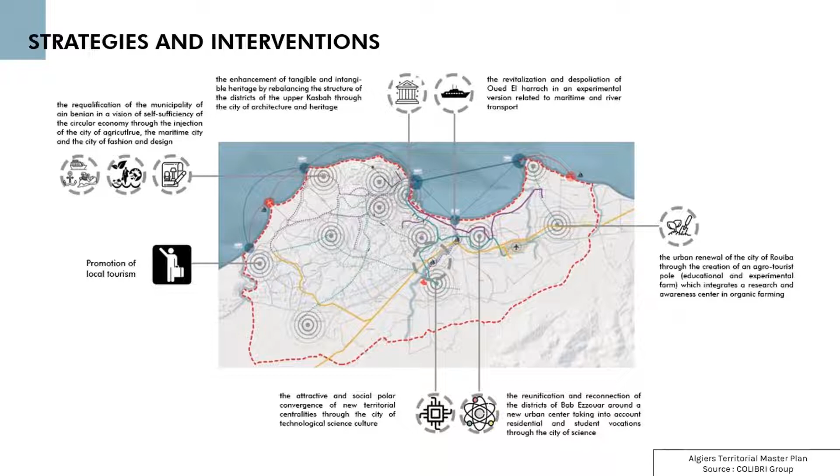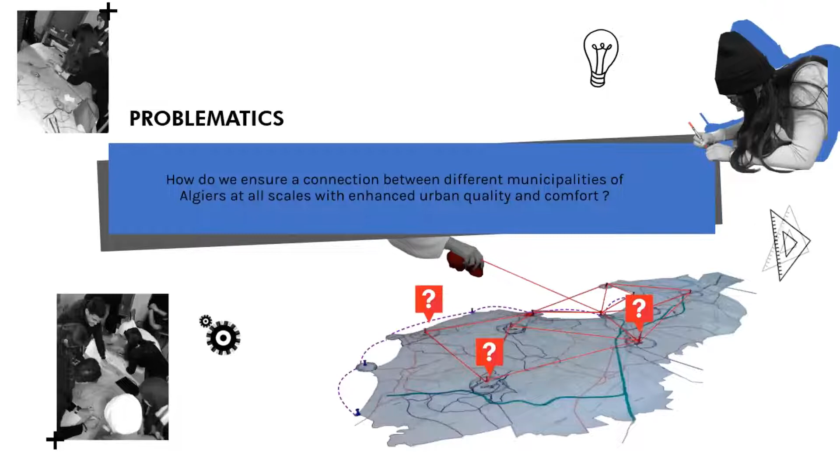Moving on from territory to municipal scale and choice of municipality, faced with a second problematic, which is ensuring connection between different municipalities at all scales with enhanced urban comfort to therefore enhance the entire territory, the logic behind the choice of Baraki, implemented with the aim of my research, which is Algiers' resilience facing the COVID breakouts,

identifies the university hospital centers as a main factor across the territory to first identify the municipalities in need of necessary facilities, to later select a municipality which would act as a catalyst to serve the southern municipalities and connect them to the major regional destinations. The Baraki municipality is thus strategically positioned to grow as a catalytic hub in Algiers.

Located at the crossroads of major existing and planned transportation infrastructure and surrounded by the main southern municipalities in need, it will thus be designated as an integrated node to support the regional growth and connection to regional destinations.

Baraki City is envisioned to be Algiers' second metropolitan center connected to major regional destinations by rapid transit and an efficient road network designed to support walking and cycling. This reflection has been achieved through studies of the urban structure.

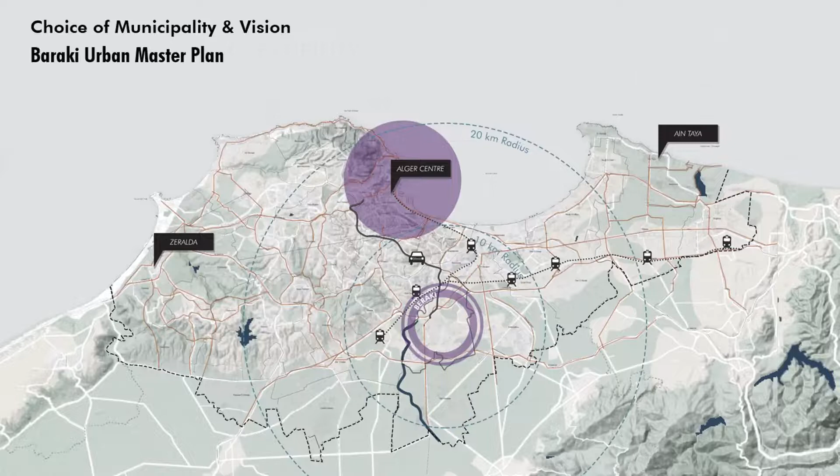Starting off with infrastructure and accessibility, the main national roads are identified to trespass Baraki, depicting the strategic situation of the city, which contains multiple nodes and intersections of these roads, giving wide accessibility through a wide range of access as well as the existing metro and bus lines.

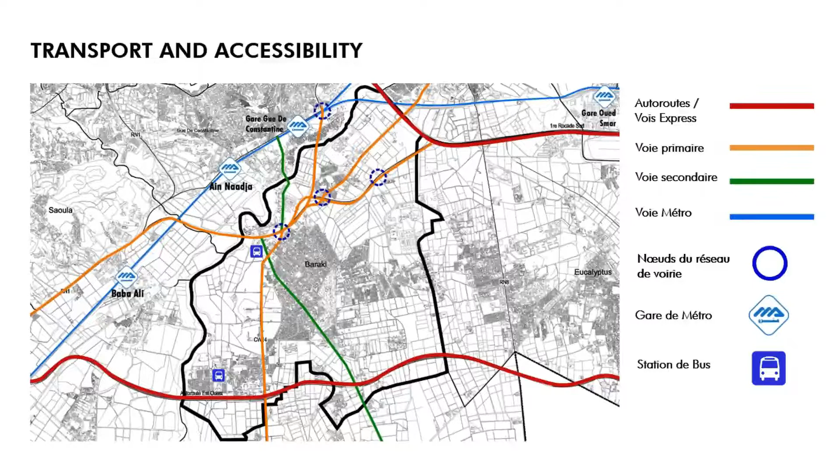Baraki is also characterized by its urban vernacular being intertwined with Oued El Harrach River, which, revered as the Mother River, extends all through the territory and has nurtured the city's history, culture, and economy for millennia, which allowed the city and Oued El Harrach to forge a symbiotic relationship.

As for the functionalities of the municipality, Baraki is already a dense mixed-use area with significant agricultural lands and natural zones which depict 45% of its total surface.

At its core sits the urban and municipal function areas, from housing and large residential districts, outdated buildings and suburban communities, depicting 30% of its surface.

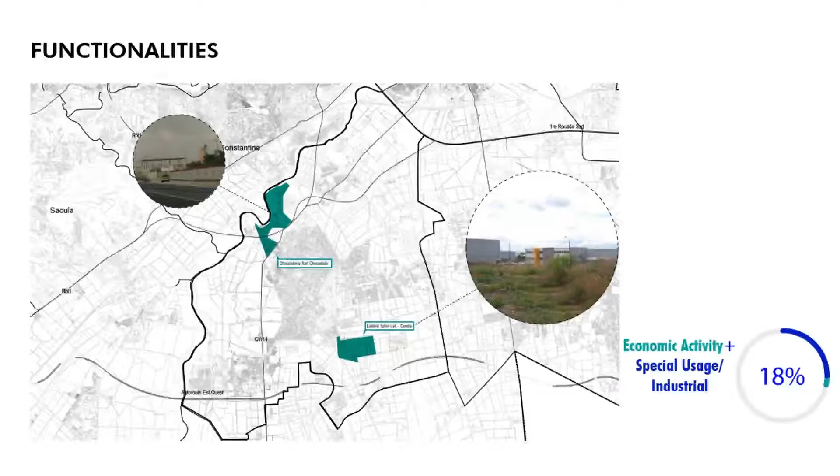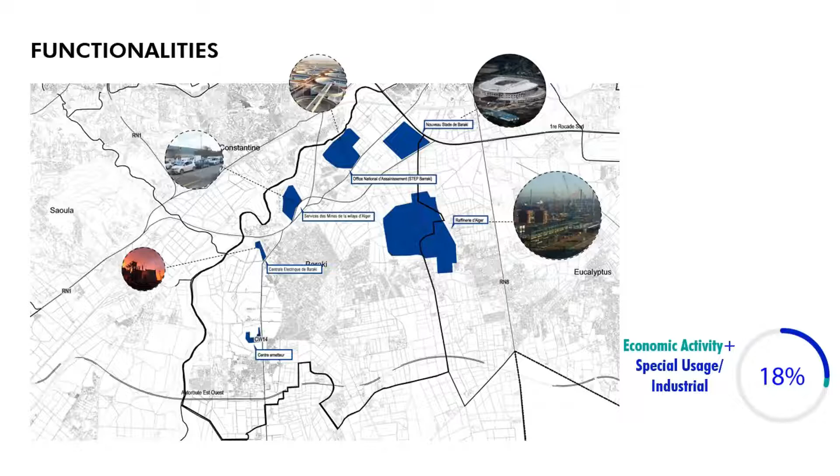It is also greatly characterized by various economic and industrial activities such as the refinery, power station, sanitation office, and special and touristic areas such as the Baraki Stadium, depicting the remainder of its total surface, leaving behind 9% as ambiguous areas.

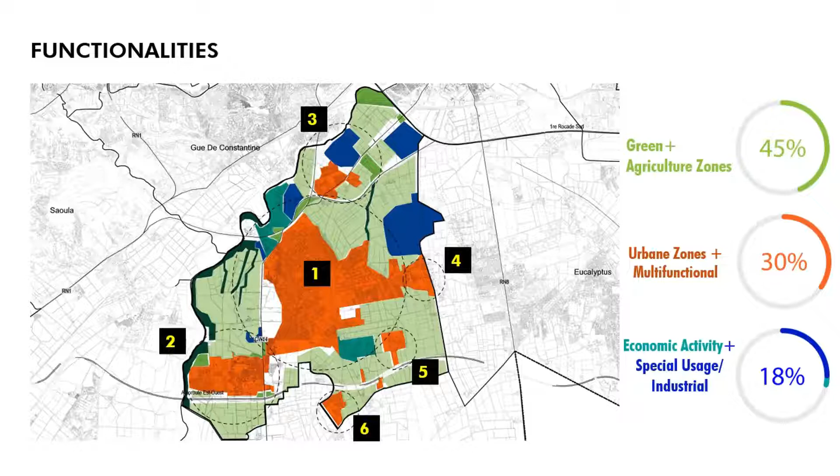The functionality showcases that Baraki has always been an important transit point, a focal spot in the settlement throughout history as a result of its geographical features, starting from the Ottomans' reign.

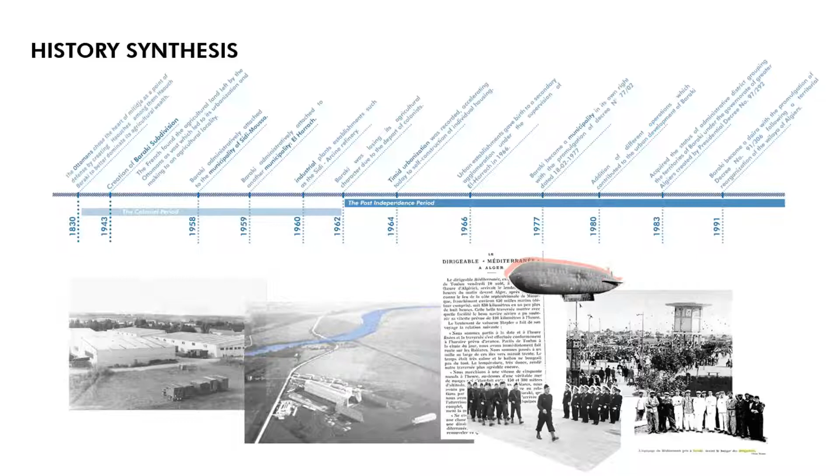Under the rule of the French state, many foreign settlements arose in the 19th century, primarily because of its strategic location. The city's morphology and sociocultural identity has changed over time, depending on population movement as well as military and political processes. Baraki's urban form is typical of the region's ancient vernacular, with historic buildings straddling both sides of a canal and bridges providing critical pedestrian links across.

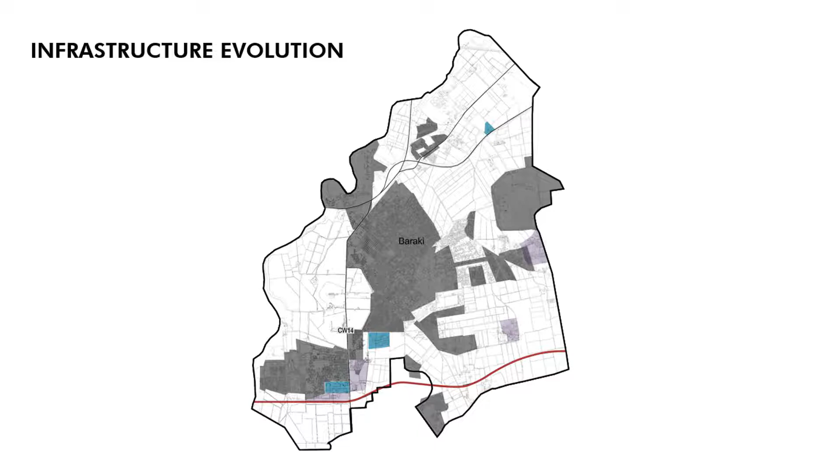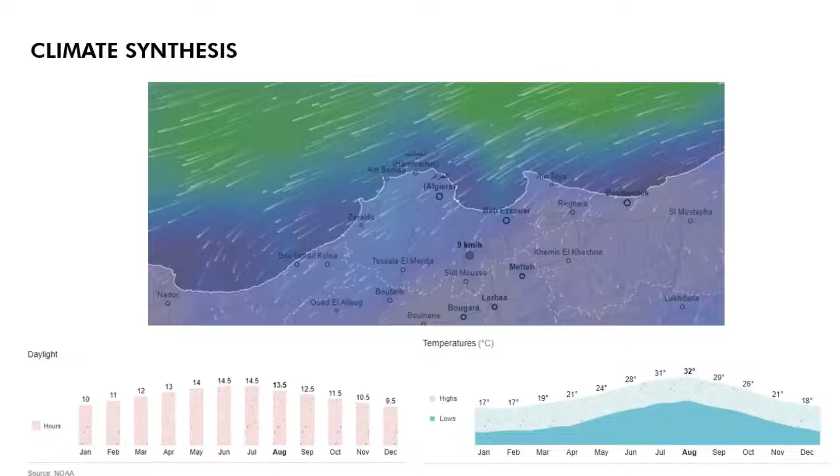The local history and recent development on site have left multiple issues such as fragmented parcels, construction waste, and disturbed ecosystem. In addition, Baraki experiences severe urban heat effects, as well as environmental challenges brought about by rapid industrialization and urbanization. The city plan area has been organized into a number of distinct districts, each with its own emerging identity, function, and scale. Analyzing each of these sub-areas will help create a better, vibrant, and more urban downtown by defining and understanding each area through a smaller scale and framework.

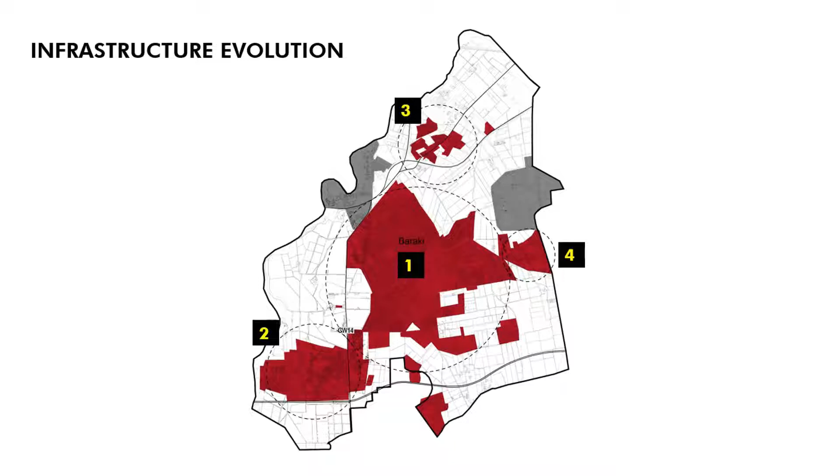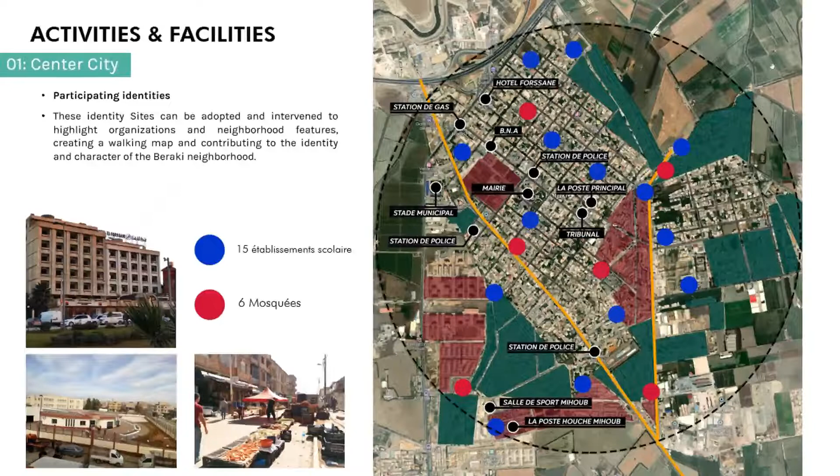Starting with the Center District, which contains the intersection of the Wilaya road networks, it is heavily characterized by educational establishments and mosques, with a variety of multifunctional facilities, as well as residential districts, such as the Diyar Baraka, the ADL Implemented Departments, and Sigil House residential districts.

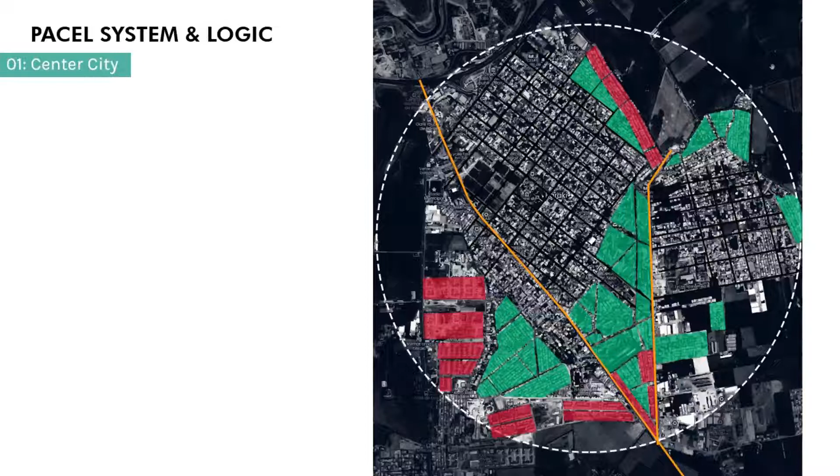For the parcel system and implementation logic, a regular layout is identified, as well as a logic behind the parcel systematic division at the historic core of the Center District. An irregular layout is also identified as an unfounded division and system logic behind the historic urban extensions. Lastly, the latest urban extension showcased irregular shapes and layouts depicting the historic and implementation logic.

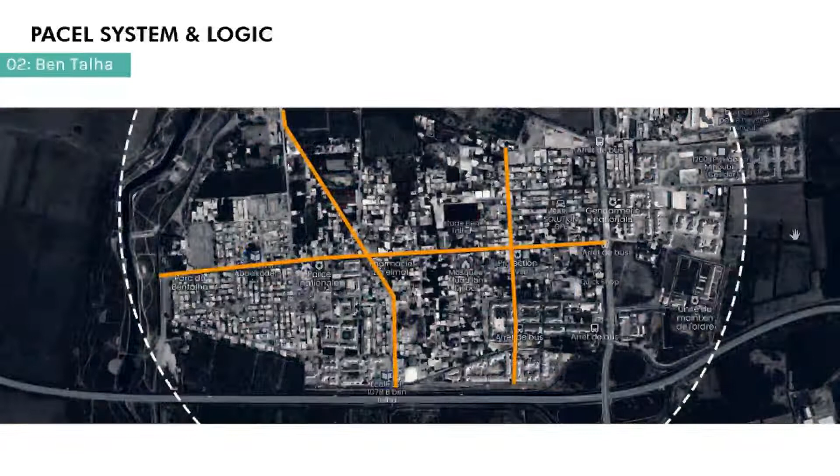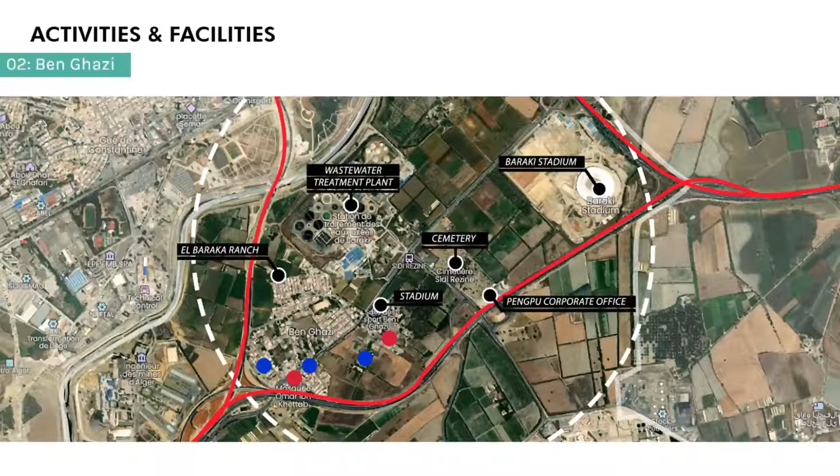The same characteristics were identified in the rest of the districts, except for each exceptional character depicted by its location and facilities, such as the accessibility to the river of Bentalha, an industrial and touristic character for Ben Ghazi, to the wastewater treatment plants and Baraki Stadium, as well as agricultural lands. The rest of the districts are characterized by being rural extensions surrounded by agricultural lands with little to no connection to the previously mentioned communities.

Concluding the analysis with the results and diagnostics, we have identified a large percentage of housing and buildings in a deteriorated state, lack of stormwater management system, density of buildings with same functionality and scale, infrastructure of new extension in disorder, and lack of connectivity between different communities and neglect of public parks.

This brings us to the problematics on how to ensure connection between the different detached areas of Baraki to create a homogeneous and sufficient community, how to revitalize Baraki and reconcile its various potentialities to strengthen its urban comfort and identity, and how do we implement it as a catalyst which performs on the scale of the entire territory of Algiers.

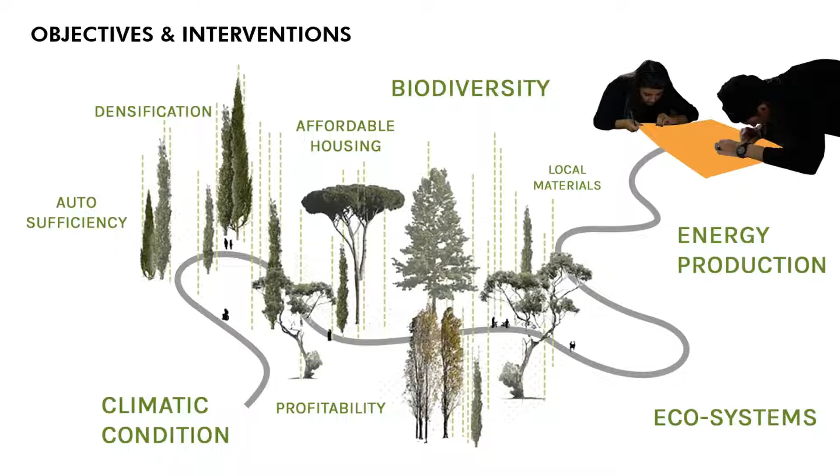Following the Colibri Group approach and reflection, objectives of the master plan of Baraki have been identified, such as biodiversity, ecosystem, densification, and autosufficiency, which act as the basis of the 5 main interventions of Baraki City Master Plan, designed to be a new model of transitway development through systematic organizational change, economic development, affordable housing, workforce development, and access to various services.

These strategies and objectives were further developed into 3 sections, each according to a fitting field of intervention: the socio-economic field, the natural environment, and the urban environmental fields. The socio-economic field aims to boost the municipality's economy and consolidate the mechanical network, give Baraki more orientation and accessibility by exploiting the tourist aspects as a financial source, linking the character of industrial areas to the economy of the municipality.

And resume the flow of adjoining municipalities by dispersing the services of Baraki through a more pleasant flow of traffic. The natural environment aims to maintain the urban agricultural space, reanimate and reinforce the green structure by developing abandoned agricultural areas, sustainable environmental management.

And ensure self-sufficient management of green areas. Finally, the urban environmental fields aim to assure connectivity between dispersed urban areas, preserve their identity, and strengthen links between the city, the river, and various economic and industrial characteristics, as well as improve the living environment condition by injecting new infrastructure with a long-term functionality, and the necessary and missing services and facilities.

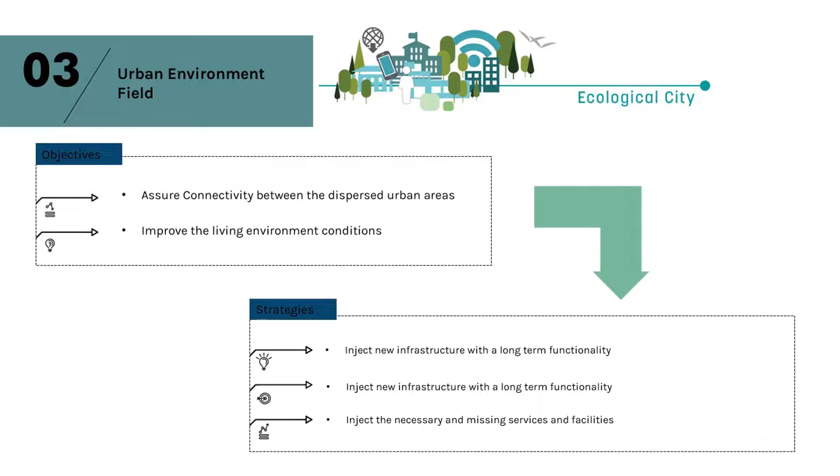Introducing next the conceptual approaches and studies before the final layout of the master plan. First, the collaborative approach concept.

The Colibri Group's reflection was to work collaboratively across communities to realize shared goals for student intervention at all scales, achieving synchronized connection between our intervention and benefits across all communities. This collaboration approach within the Baraki City Master Plan reveals the potential of the connection with El Mohammadia municipality.

El Mohammadia is located at the intersection of the axis of the bay with that of the river, giving it a central position. Baraki is located south of El Mohammadia and connected by the Oued El Harrach axis, which allows the two municipalities to benefit from significant potential.

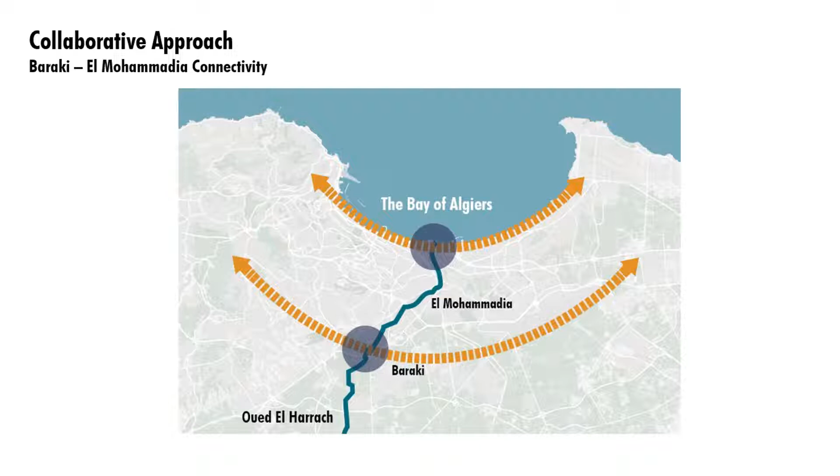Following the possible flagship projects they could host along this connection, the collaborated master plan will inject structuring episodes and a series of urban protagonists in a process that recombines inherited urban forms, innovative mobility, and enhanced landscapes. These collaborations highlight the importance of Oued El Harrach, starting from the Bay of Algiers and continuing south through the territory, passing multiple important nodes in both municipalities.

Therefore, the collaborative vision is to create an interactive urban living environment with a rehabilitated river setting. The master plan sets a new benchmark for development in the territory, connecting strategic poles and forming an ecological green axis as a structuring element between the two municipalities.

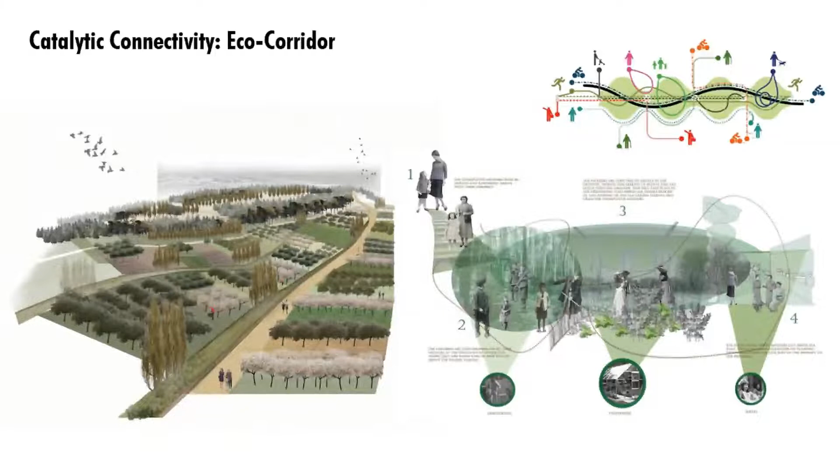This green axis, introduced as the Eco Corridor, will establish connectivity between the city's various ecological zones, promote environmental ideals, urban ventilation spaces, and rehabilitate the city's ecosystems. The proposal is based on reconnecting unexploited green areas to the urban, historical, and environmental fabrics of the city through a recreation program as a transversal axis.

Speaking of the fabrics of the city, the next goal is to establish community hubs to encourage community connection and enhance social engagement. Residential spaces were chosen to catalyze their becoming hubs for citizens in the face of dense development.

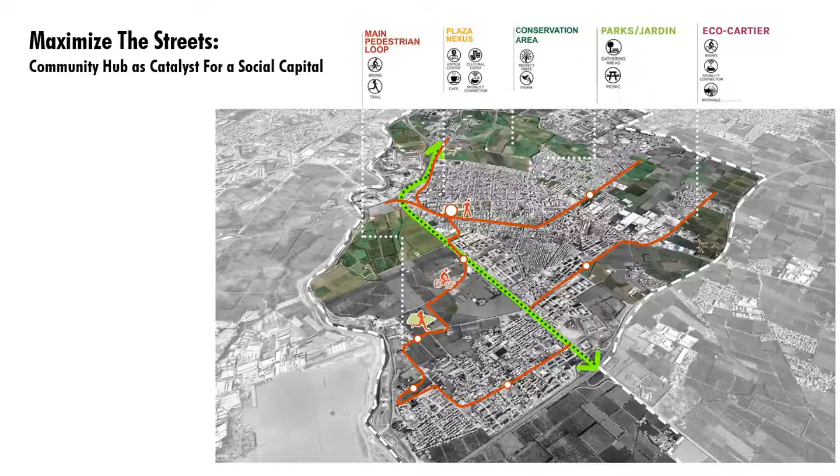The pattern of development will result in a connected proposal of public spaces running through the entire town as a circuit while solving connectivity problems. The vision for this new mobility network is a finer-grained, connected framework that facilitates mobility and enhances safety for all citizens, creating a vibrant, pedestrian-oriented downtown, which was the root of introducing the superblock concept.

The superblock concept carves out islands of car-free space by routing traffic around the block, combined with innovation in residential urban spaces. Vehicle traffic will only be permitted around the perimeter, leaving streets within the district accessible only to residents, essential services, or deliveries.

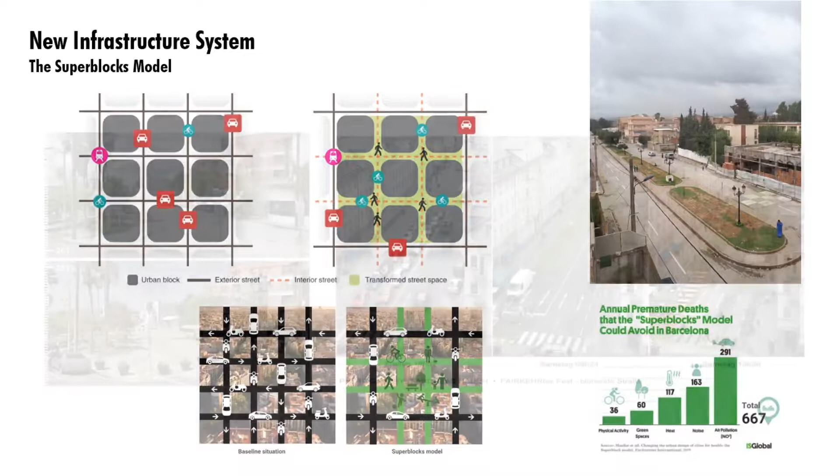The interior component will have narrow car lanes and reduced speed for vehicles, giving preference to pedestrians and cyclists. The motive was to reduce vehicular pollution and move towards sustainable mobility, to recover space for the community, improve biodiversity, and encourage social cohesion.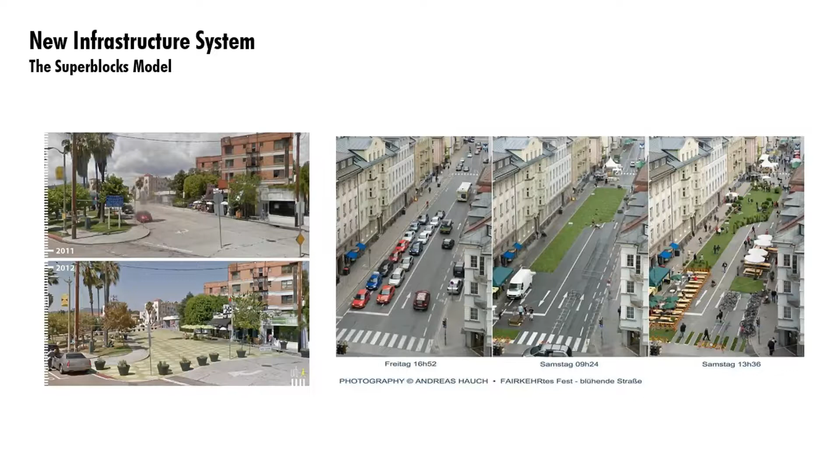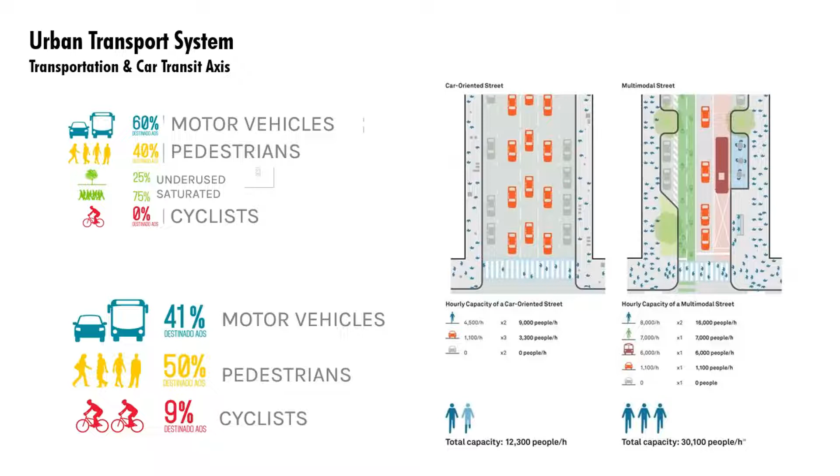Speaking of redefining the axis, in order to distance from the physical and visual barrier created by the high-speed rail line, this will carry the dynamic and fluid line of Baraki and contain bicycle routes, pavement, parking areas, and a metro line, converting the road from two-way to one-way transit.

Moving on to Baraki's residual spaces, today this legacy remains in the form of distinctive colonial era buildings carried throughout the city's urban fabric. Baraki's connective tissue seeks to identify, analyze, and program residual spaces with the intent of counterbalancing top-down development and providing intervention that can influence broader neighborhood processes.

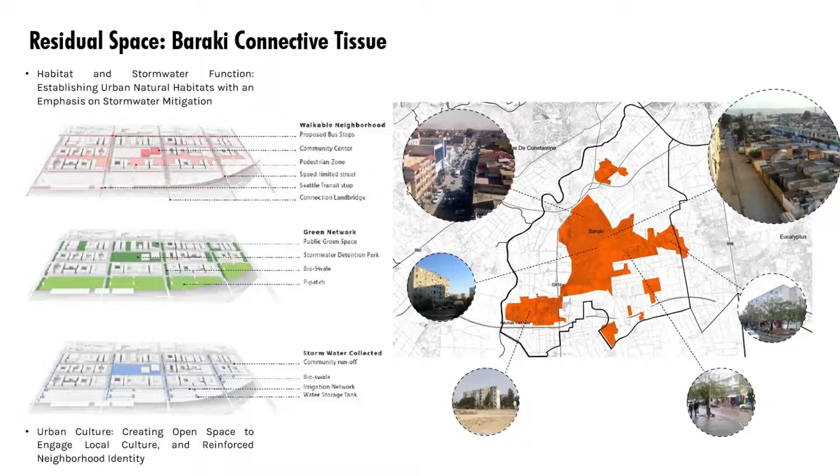These interventions will focus on creating urban natural habitats that emphasize stormwater mitigation and engage urban culture through citizen participation, to ultimately conceive of a new residual infrastructure that enhances neighborhood identity and systematically promotes community and environmental health.

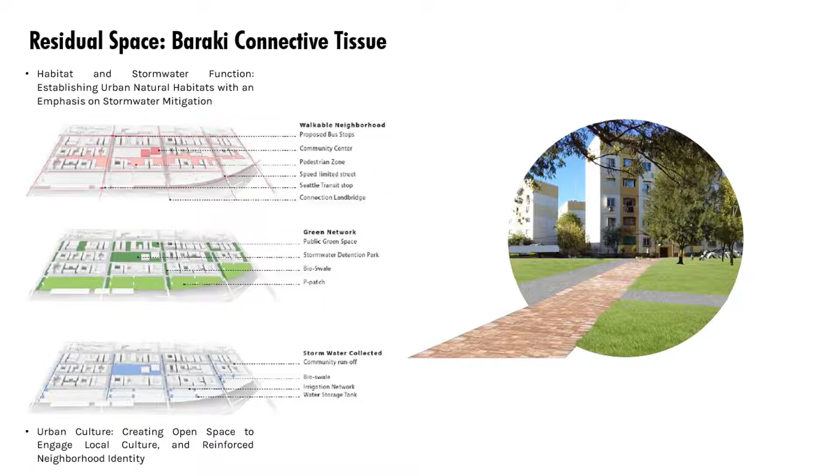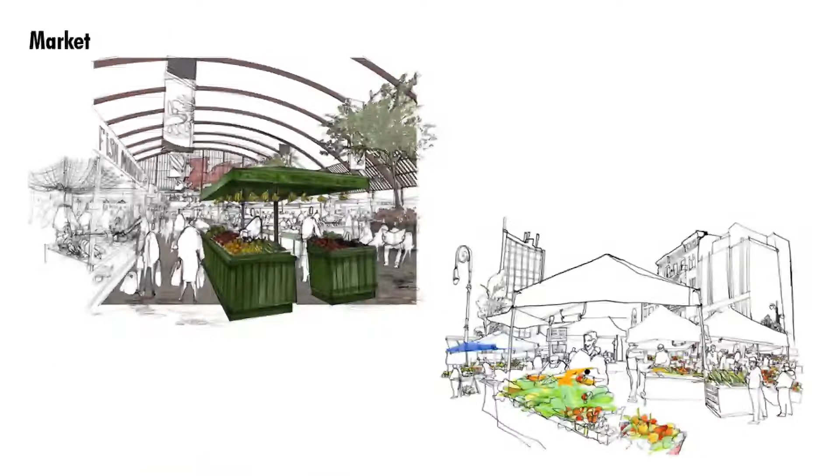Distinct and vibrant neighborhoods will be injected, including a dynamic and innovative multifunctional district such as the business sector, various parks, bus and metro stations that promote biodiversity, a hospital, renovated markets, and academic buildings, forming the framework of the new Algiers Center. Each of these areas will have its own unique character that together will create a diverse, authentic, and interesting downtown of Baraki.

As discussed before, a coordinated and collaborative process involving the two municipalities, Baraki and Muhammadiyah, working collectively on the proposed station and river master plan at the same time was needed. The aim was to bring together the two sides of the river to reconnect the communities along its long axis with holistic urban design along with recreational and cultural design elements.

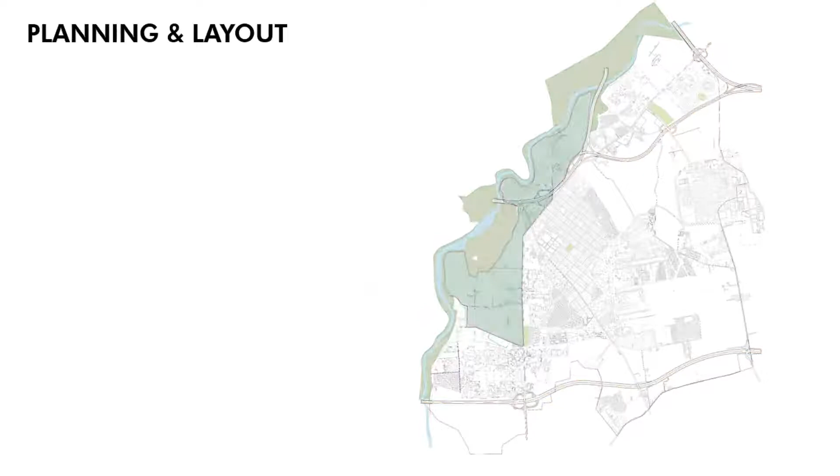Moving on to the final phase, which is planning and layout of the interventions, composed of the river management, injection of green areas and urban agricultural parks, and interventions of the urban districts of Baraki, as well as the North Gate. Through my intervention, I wanted to give a new image to the city by consolidating its northern gates, taking into account the different urban aspects as well as the economic and social notions in order to ensure good urban functioning.

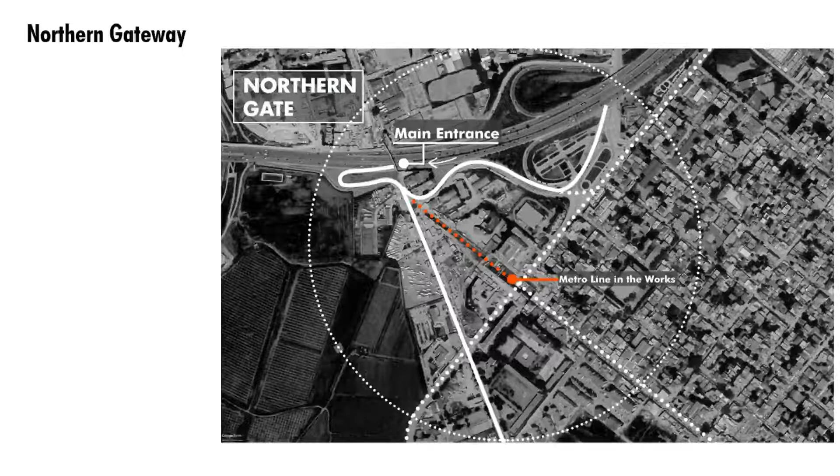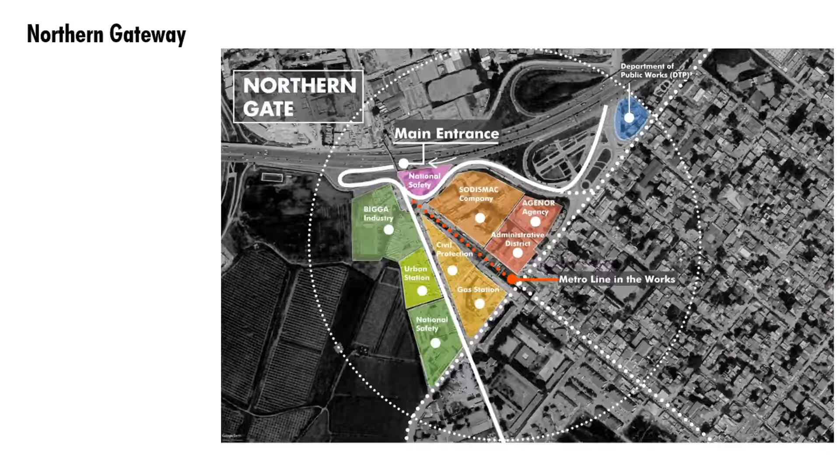The gateway is characterized by a main entrance that traverses industries, stations, and agencies, with a metro line in the work. To enhance the image of the city to visitors, the intention is to relocate the entrance far from the industrial character it is already integrated in, to an open green site accessible to the public, by integrating a new bus station with enhanced design and visitor-friendly facility program, which creates a variety of activities for the year-round enjoyment of residents and visitors to the district.

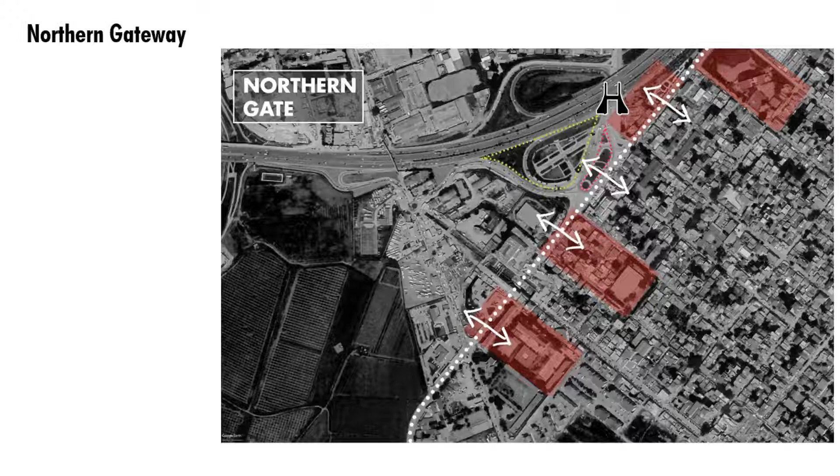The master plan optimizes development potential around transit nodes and provides for an enhanced network of pedestrian-oriented streets and destination public places. For the core district, a major transit hub will be located, building on the existing historical district, which is delimited by the east-west highway, the north gates, and the main wilaya networks.

Beginning with a strategy for the adaptive reuse of the historic core, the design outlined a conservation plan that maintained the ancient urban fabric, defining the underutilized edges to be transformed. The plan thus restructures and rehabilitates the main and secondary networks, penetrating into this once enclosed core, creating a more intimate urban experience and improving the walkability of Baraki city.

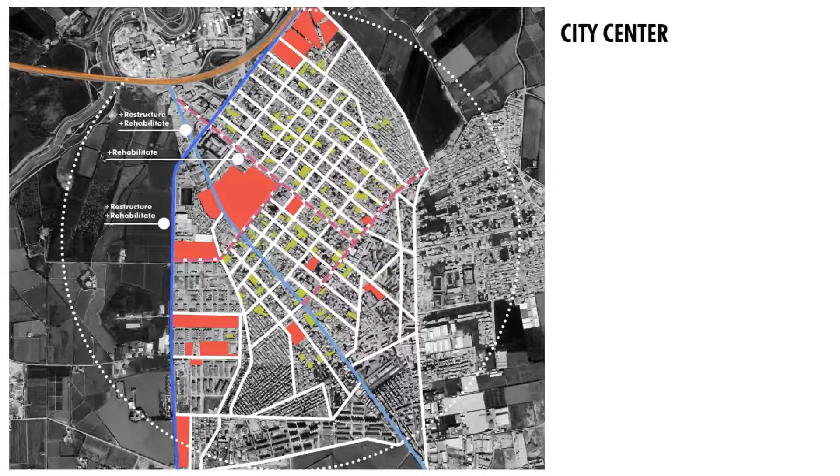Existing alleyways, narrow streets, and new streets were carefully aligned to respect the integrity of the old town by injecting the superblock concept to keep privacy in residential areas, where limited access to cars will be integrated to support pedestrian walkability.

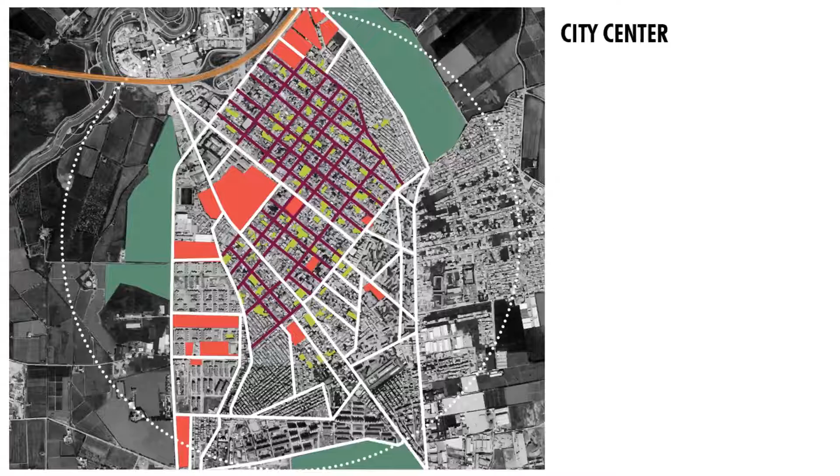Aiming to fill the existing urban void and link together separate clusters of diverse activity and urban fabric, as well as limit the rapid industrialization and urbanization of agricultural lands, the plan transforms the traditionally underutilized natural lands and farms into a public agricultural park, brimming with programming and activity that is interwoven with the rich ecology and local production of Baraki.

A tree-lined pedestrian path punctuated by plazas and amenity spaces serves as the district's cultural corridor and north-south connector, which will restore Baraki's ecological networks and improve the city's natural ventilation systems.

Along the main road, the Baraka Plaza will be integrated, which hosts various open space programs, and the future metro station will be located at the extremity of the district to provide a new civic heart for the development. The plaza will be constantly activated by pedestrians traveling between the metro and the injected facilities. Multiple community facilities are located in each neighborhood to further encourage walkability, social interaction, and connectivity to the network.

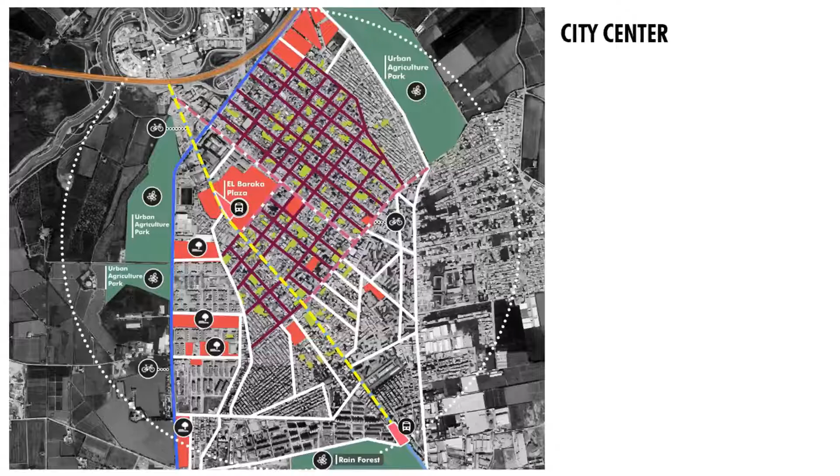The same principle has been configured in the rest of the district by first relocating the potential underutilized areas and injecting a fitting program according to each character and potential.

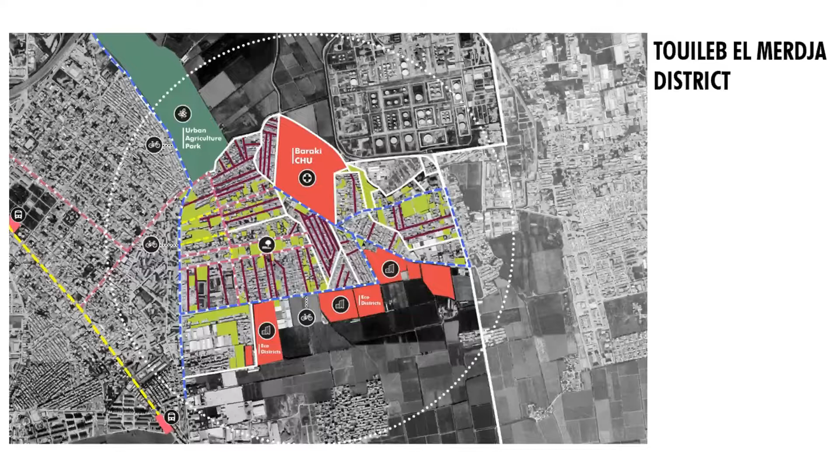For Touileb El Merdja, multiple eco-residential buildings have been injected to restructure the extension of residents in disorder, as well as a university center scale hospital, a market, and extended networks to the agricultural park to allow attraction for multiple visitors. With the metro station located as a strategic point, it will act as a node between the two districts, the core historic and Touileb El Merdja.

This node is also applied on the South District, with the rainforest and the commercial building as a main attraction, allowing walkability from the core district and Touileb El Merdja, as well as the Bentalha district, located on its east, characterized by accessibility to the Oued El Harrach waterfront and its delimitation by the highway on its south and Wilaya roadways.

With a high potential underused site located, main surrounding roads have been identified and rehabilitated, as well as the restructuring of the Wilaya roads to a one-way transit road. The injected facilities and buildings have been given the functionality to support a cultural hub character of Bentalha, as well as the thorough planning of the river park management to give an area of rest.

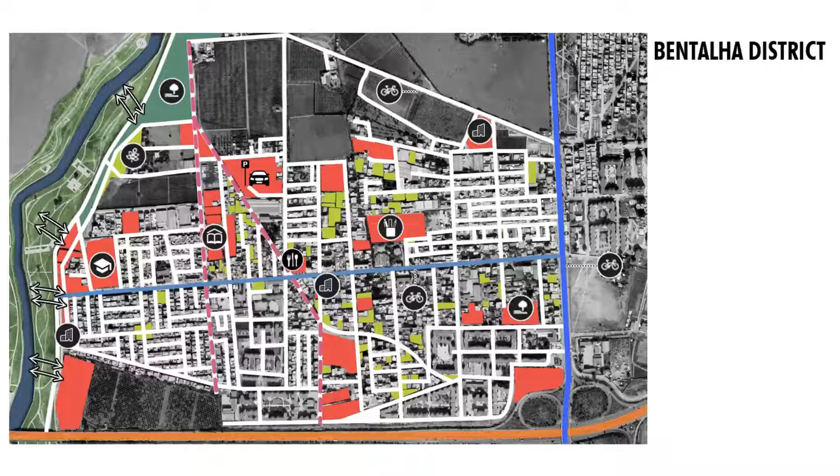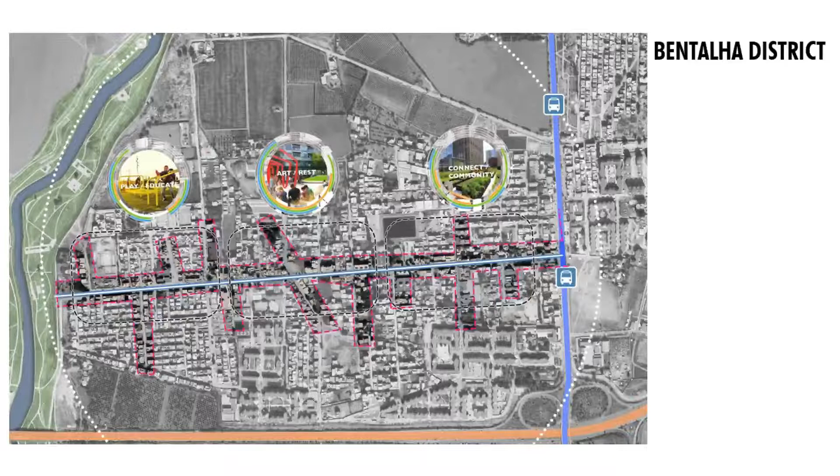Designed to serve both the citizens and various school students, it functions integrated with the reading gardens and recreational areas nearby. The presence of significant new educational buildings and river park will expand the Bentalha district, creating a stronger campus identity and student energy at street level.

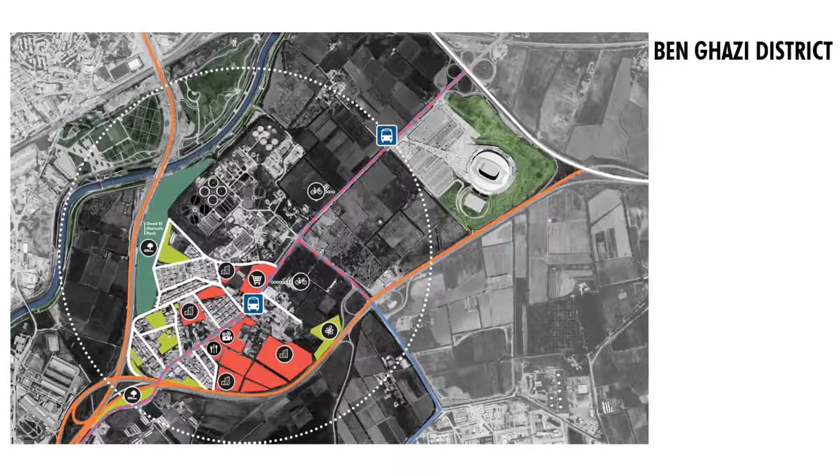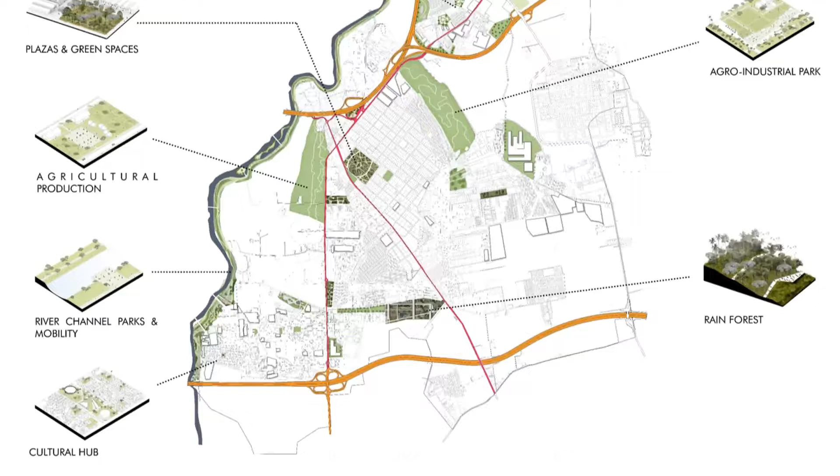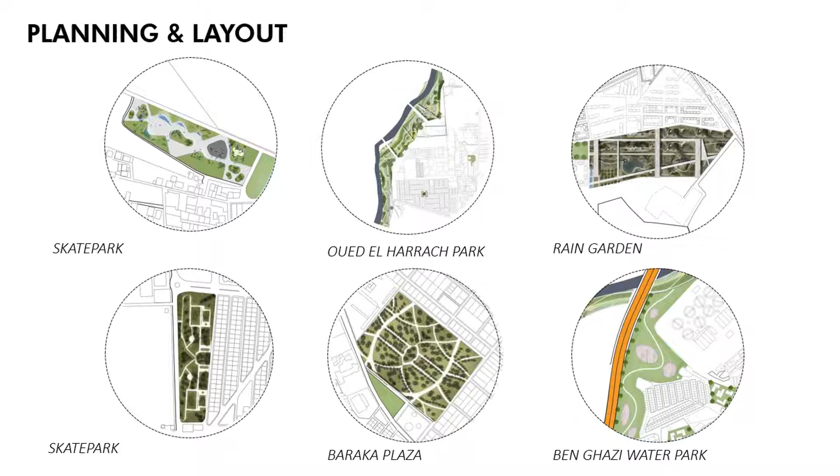The resultant master plan is thus a series of distinct neighborhoods and mixed-use areas, each with its own emerging identity, function, and scale, including dynamic and innovative sectors, which will form the framework of the new Algiers Center by creating a diverse, authentic, and interesting downtown, as well as various green parks, which will help restructure Baraki's ecological corridor, from user-friendly to passive integrated programs which will help mitigate floods, urban heat island effect, and self-sufficiency of green areas, as well as river management, which joins the renewal of the riverfront with municipal needs to grow a green economy and improve the ecological health of the river.

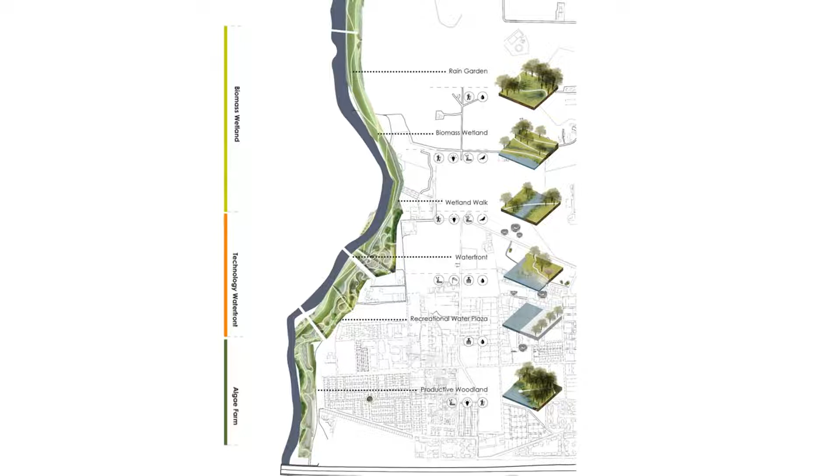The park is expected to give greater cohesion and connectivity to recent projects in the area, with its injected maritime station, with a thoroughly planned annual program designed to serve the citizens, tourists, and academic students, as well as the students from the Integrated Research Center in Ben Ghazi.

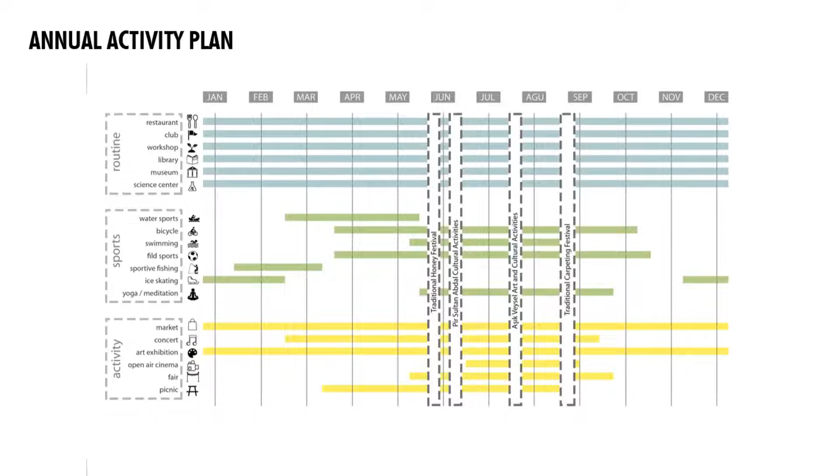Last, for the appendix, I will be mentioning the norms used for the structure of the roads and green networks, as well as the stormwater management system used for the functionality of the integrated layout.

As illustrated, the Wilaya roads network will be converted from two-way to one-way traffic and injected with a bike lane to enhance the accessibility of local users, boost pedestrian walkability, and reduce car transit to allow for a more dynamic and functional streetscape and boost the local commercial economy.

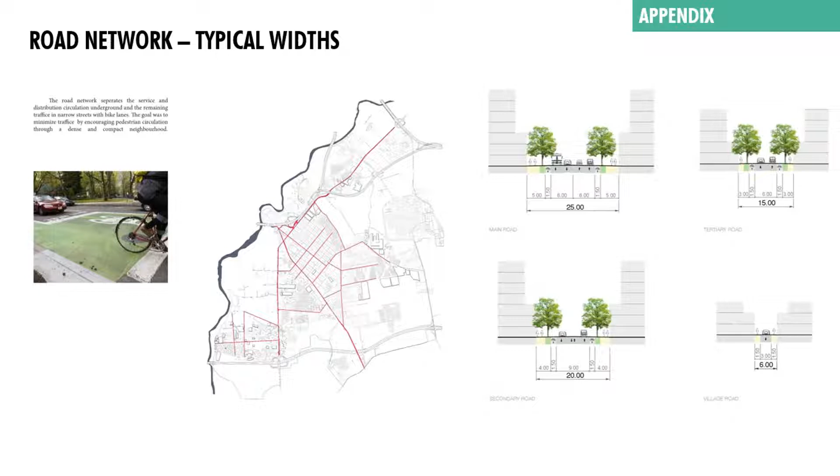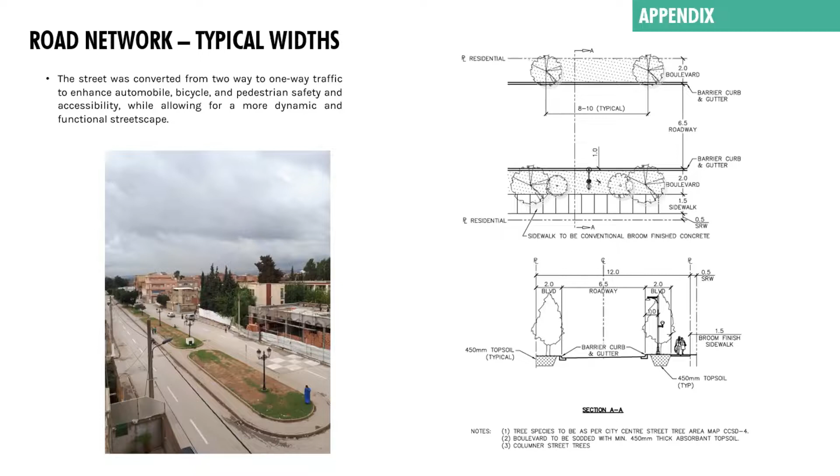The rest of the space gained from this transformation will be used as buffer space to inject pedestrian-friendly programs and landscape. A thorough study of bike transit planning has been done to choose the safest configuration of bike lanes, which in this case is the curb-separated lane.

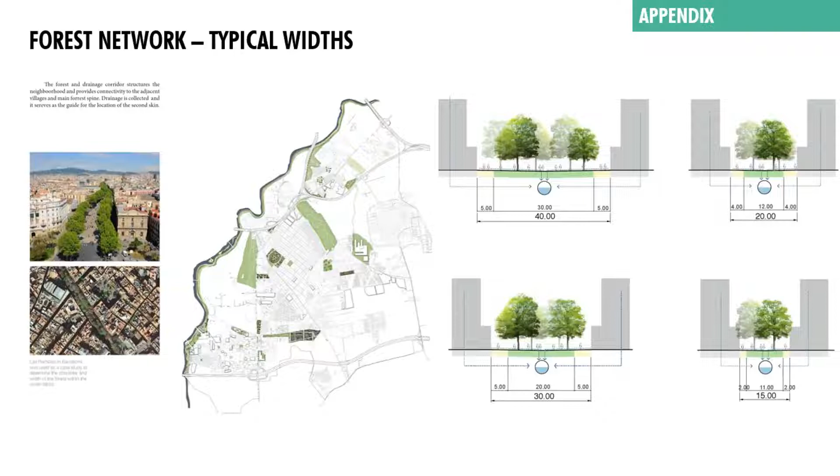Green networks have also been injected following the width norm and system of stormwater management, as well as the materials used, from hardscape surfaces used as pavement for buffers, retail parks, and various facilities, to soft surface draining used for streetscapes, rain gardens, and ponds, which, both integrated, will help collect rainwater to be used in the long term and allow for the self-sufficiency of various landscape and green areas.

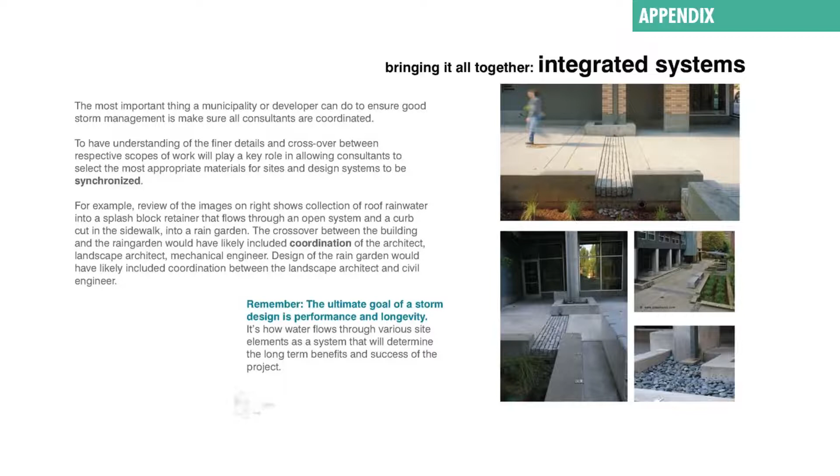One of the most significant features of Baraki is the generous landscape surrounding its historic course, viewing the large setback requirement as an opportunity to challenge the typical approach to the city's ubiquitous buffer landscape condition by rethinking it as a central feature of the development.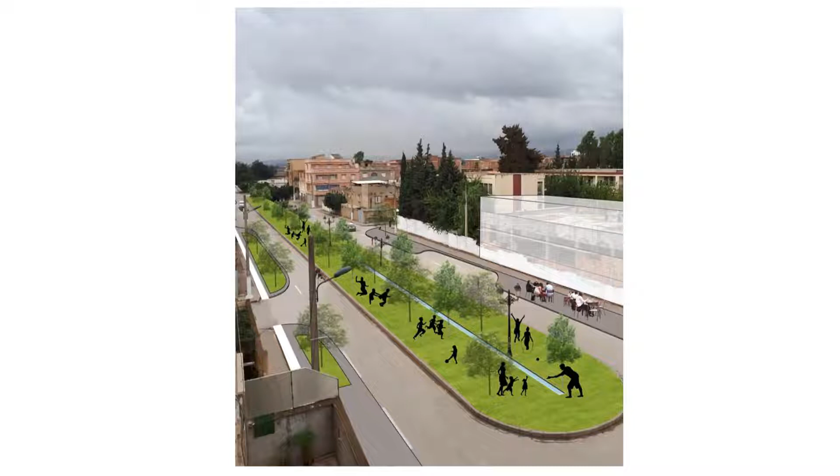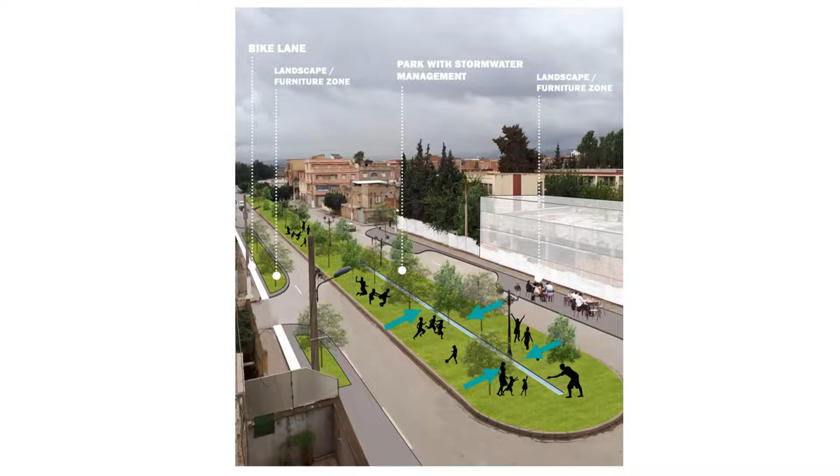These will be used as landscape and pedestrian furniture zones, such as storefronts and cafes, whereas both will have a stormwater configuration collecting and reusing the water. Buffers will contain permeable pavers and surface draining through the injected landscape, and the parks will have an automated water-receiving landscape.

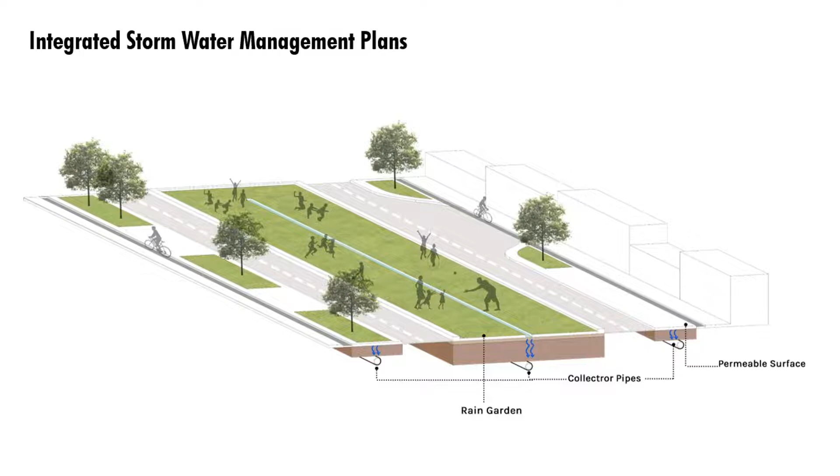The collected water will flow through injected collector pipes to be reused by various landscape and programs, or flow directly to the river. Such design and the rain gardens have been injected all throughout Baraki city, as a series of green blocks that connect various nodes of the neighborhood, provide a gathering area, and recycle the biomass.

This ecological regeneration will raise awareness of the importance of the landscape to Baraki's renewed identity and the entire city of Algiers, a true aspect of sustainability in the face of our specialized academic option.